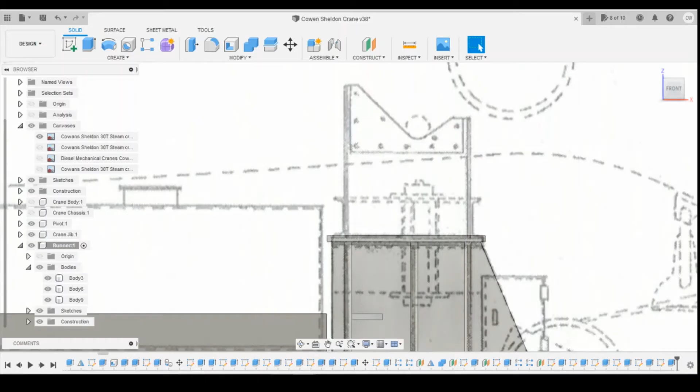So if we go into Fusion, I'm going to turn this canvas off and create an offset plane from the top surface of that cradle, and just come up by 0.2 millimeters. Let's delete all that lot, start again - 0.2 millimeters, okay, and it will be creating a new body here.

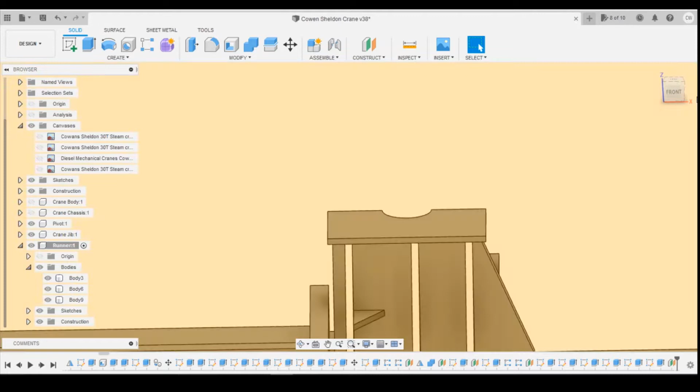So we will have to start to think about labelling these up, I think, in a little bit, because there'll be quite a few of them here.

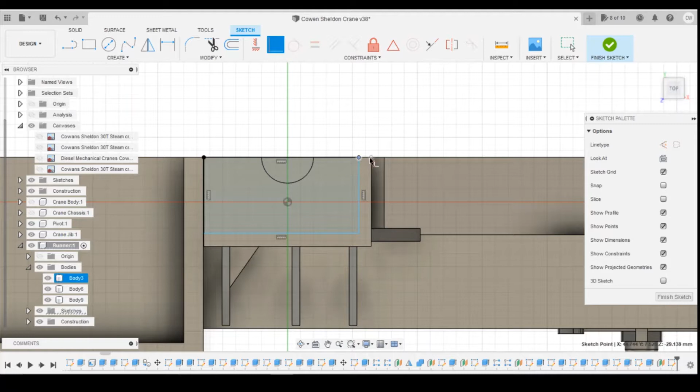So we're going to create a sketch on this top surface, and we're just going to create a rectangle that's the same size as what we've originally got here. So just do a rectangle like that, and then we can coincidence the corners in here like this. Okay, and then we extrude upwards - I'm going to go 0.2 millimeters just to give us that base plate that we've got there.

So the next thing I want to draw are these two upright plates here, which look like they're in the same position as these diagonal plates we drew in the last episode.

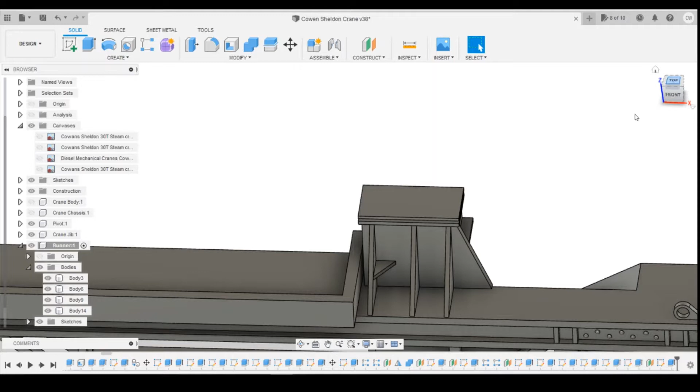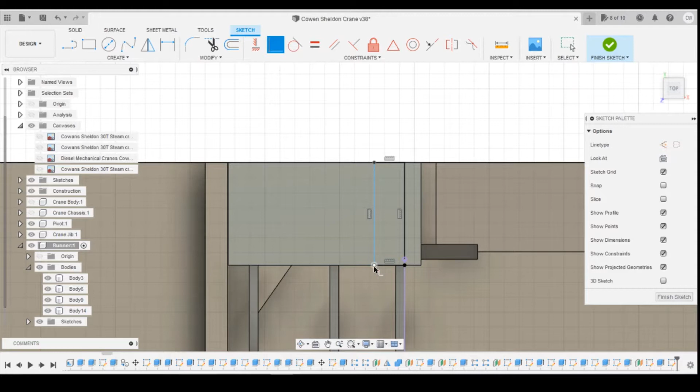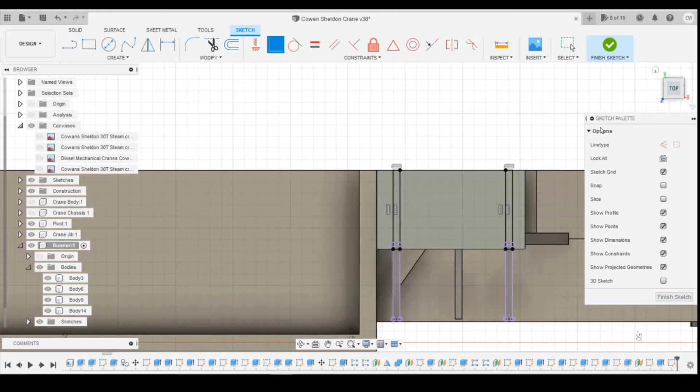So if we rotate to the top, we can draw a sketch on that top surface, and we're going to just do two rectangles for this. I'm not worried about the size at the moment - all I'm going to do is coincidence them in line. Coincidence the corner points here in line with those uprights, and that will snap the dimensions there. And do the same on this side. There you go - so we've now got those two profiles that we can use to extrude upwards.

Let's turn the canvas on, see if we've got those - yes, we have. Okay, so I've started to drag them up both at the same time, but you will notice that one's higher than the other, so we can do that to that point. Select that top profile on this one, and we can drag that the rest of the way. Okay, so we're around 1.4 there. Okay, so we've got those drawn.

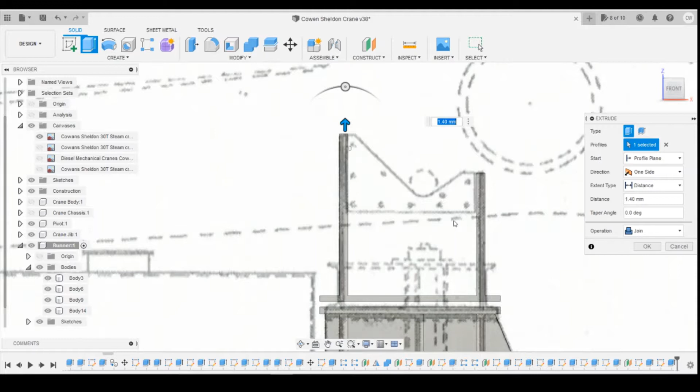The next thing is we're going to want to draw this plate here. If we look at the photo here, this plate looks like it's in line with these plates that we drew down the bottom. So if we come back into Fusion, what we can do is find the construction planes that we had for these, and just flick through these to find a plane that looks like the right one.

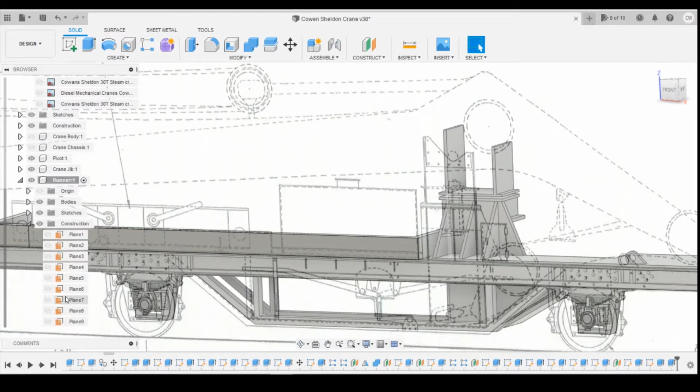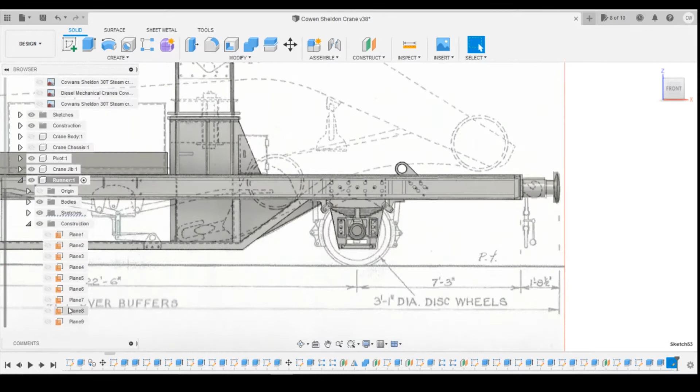Might be that one - let's turn sideways. Yes, so we're now going to turn that back on with a little eye icon so we can see it, and create a sketch on that plane. I'm not sure if that works - I'm going to finish that sketch. Plane 6, let's delete that. Or redefine sketch plane will work, and select plane 6 - we know we've got the right plane there.

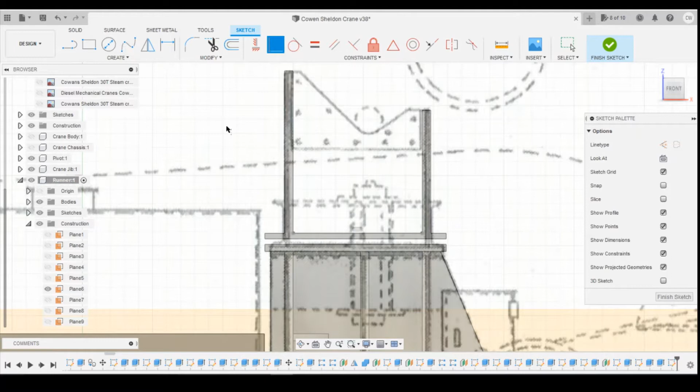Okay, so we just go back into here, edit the sketch here, draw lines here for this one. It's not going to snap into the corners as we want, so just draw a line, coincidence it into the two corner points, like so. And then we'll draw a line coming upwards - again, it's not going to snap to that point, so coincidence like that, and then the same on the other side.

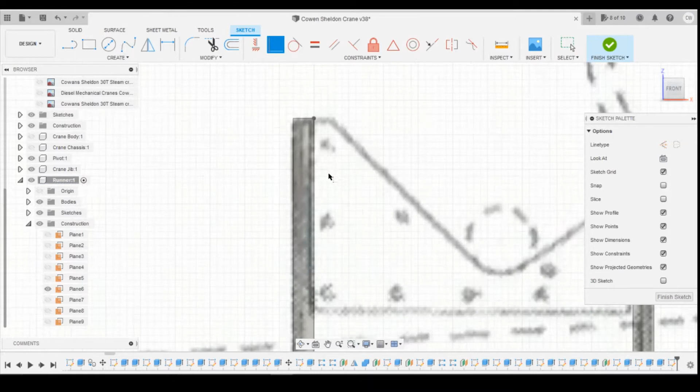So the next thing we're going to draw a freehand on here, so that's going to be a line to there and a line. I'm going to draw a line there, and I'm not worrying about its position because I'm going to fillet that corner out.

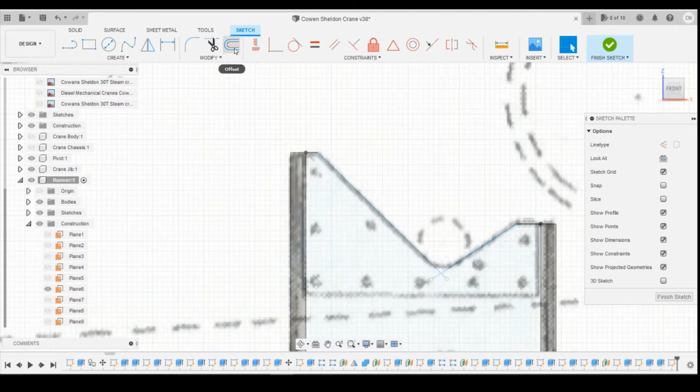Okay, so you see how we cut that in. Next thing we can do is fillet. So what we actually need to do is trim these two corners off so we can get a point, and then we can fillet that point like that. We just play around with that till it looks like it matches the drawing. So yeah, probably about 0.5, 0.55 there.

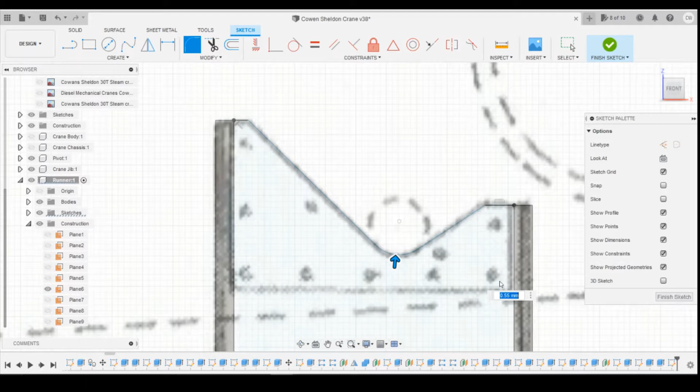And enter. Okay, and then we need to define these so that it's all predefined. Angles in there. Okay, that's all now predefined, and then we can extrude this.

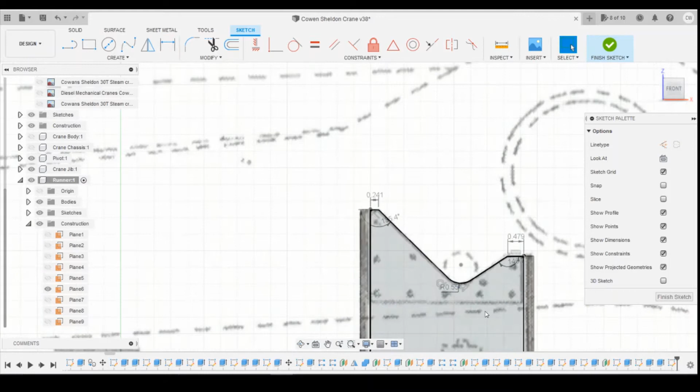If you remember, on the last plane we did a symmetrical extrusion, and I think we did 0.25 in each direction.

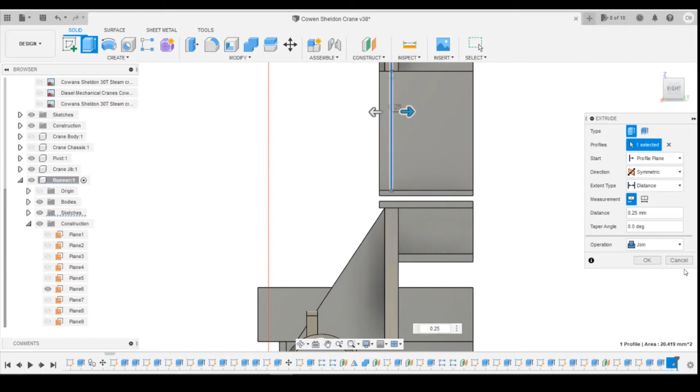We'll click on OK, and then we can check that by just doing inspect and going from there to there. That's not even picking up the right thing. Let's rotate it up slightly. There we go. You can see that is 0.25.

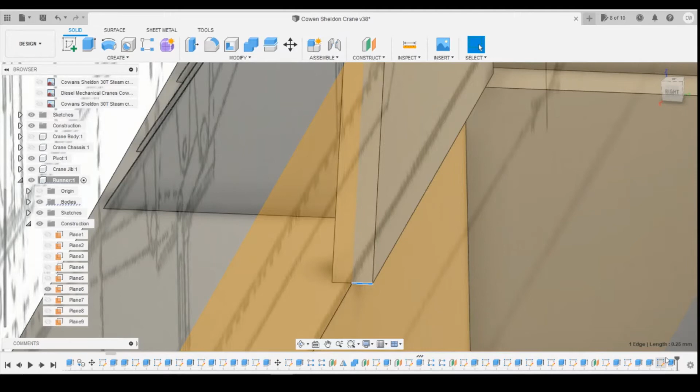Okay, so we've now got in here that profile that we wanted. The only thing that I will notice on that picture is this end is also extruded out further. So if we try and see how much of it actually comes forwards, I think it might just be the plate here and this side of the plate.

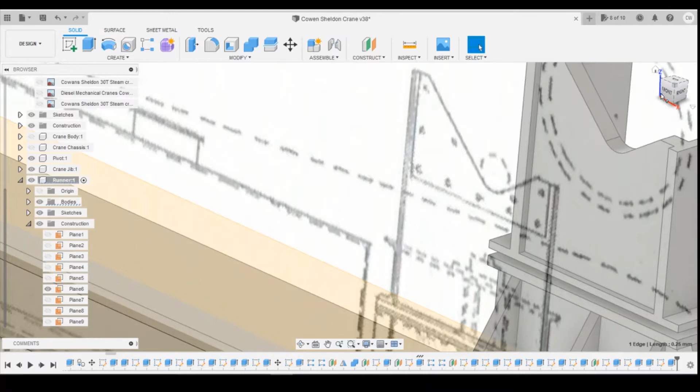Yeah, pretty much. So if we come onto the side profile and draw on that side profile just a simple line coming down here, that turns these into two separate profiles. We can extrude this one.

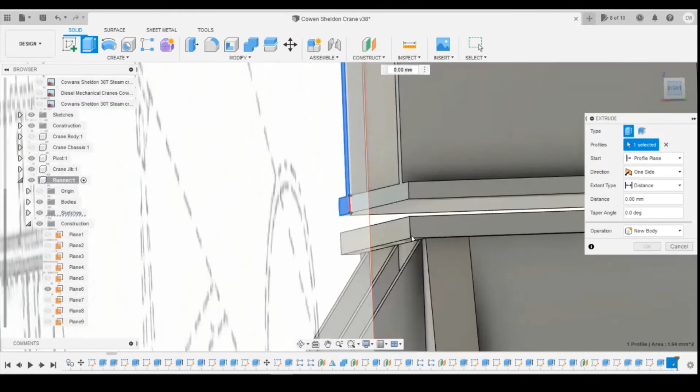Let's have a look on our canvases. It's not on there, unfortunately. So we'll just come at 0.5 millimeter forwards. Make sure it joins. There we go.

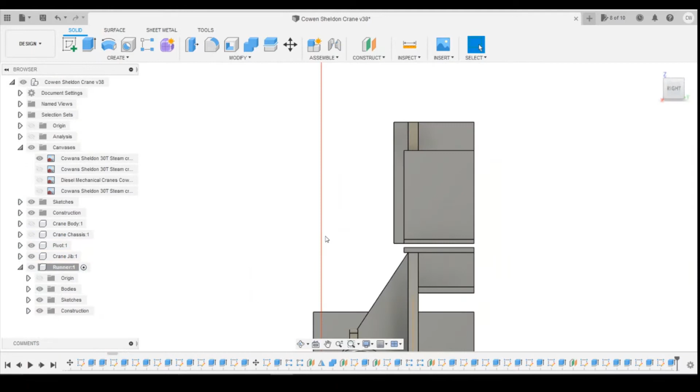Okay, let's have a look on the canvas. Actually, is there a cutout on there? No, it's not. So the profile of the cutout's not on the canvas. And what I mean by that is, if you look here, we've got like a diagonal piece coming down, which is fine. So we'll just freehand that.

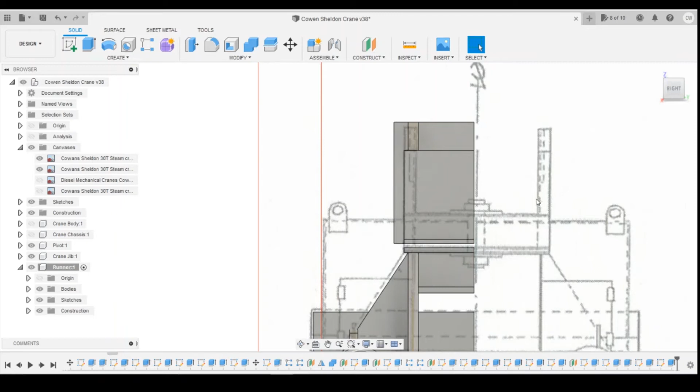So it looks like there's about a foot or so gap between the two bits in the middle here. So if we create a sketch on this side profile, initially we'll draw a line, that's a rectangle, draw a line downwards, and we'll see if we can get it to vertically constrain to that point there. Yep, good.

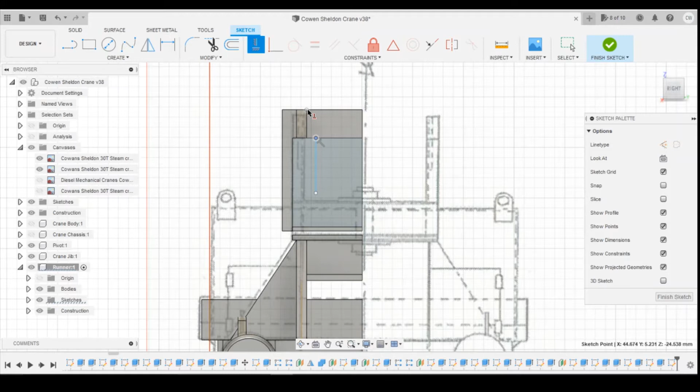Okay, let's have a look at the height. So it's only about 4 or 5 inches maybe.

So if we draw a line, we're going to start on this profile here. Something like that. A millimetre there, so we're going to have that foot gap in the middle there.

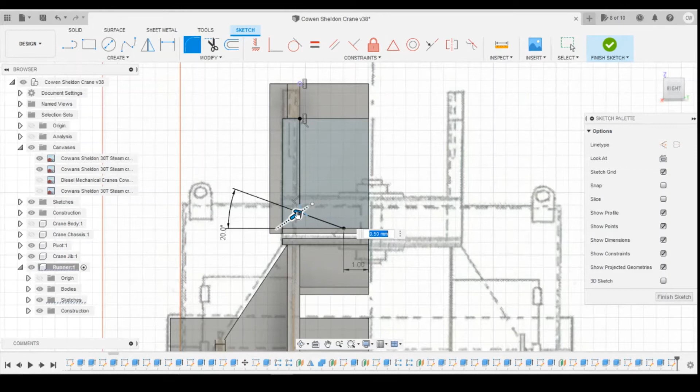Define the angle in here. It's about 20 degrees. Let's have a look. Yeah, and then I'm going to fillet off that corner just to round it out a little bit, like that.

So let's see if we've got any other photos that show it. Yeah, no, I'm reasonably happy with that profile that we've got there.

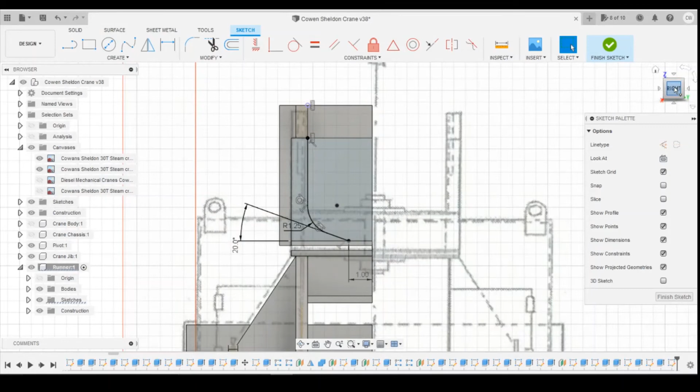In fact, I'm not talking, because there should be another I-beam up here. Let's undo all that. Sketch. Okay, let's turn sideways, see if that I-beam's on this sketch.

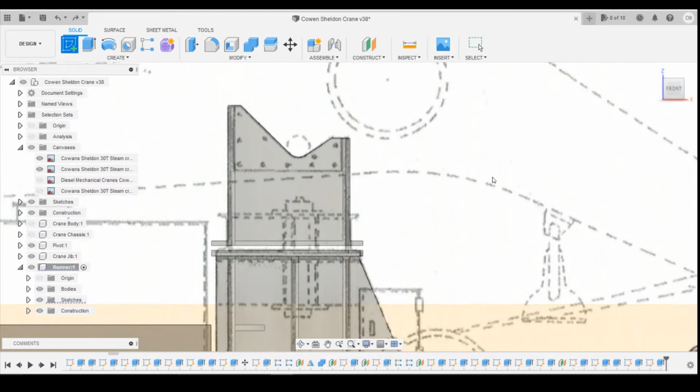Yes, it is. Okay, so if we create a drawing on that plane there, and we'll do a rectangle, I reckon it's going to be about that position. Define that, 0.3mm thick, and height-wise 1mm.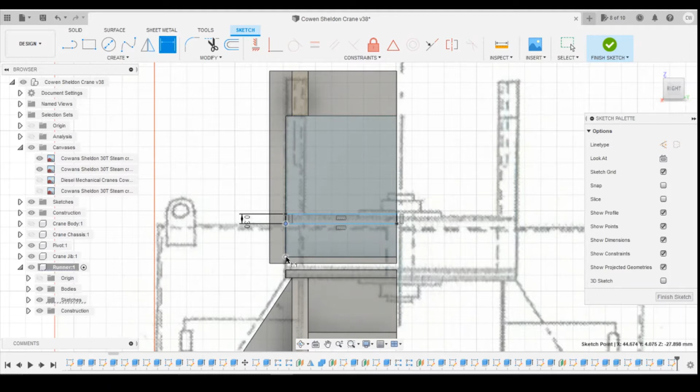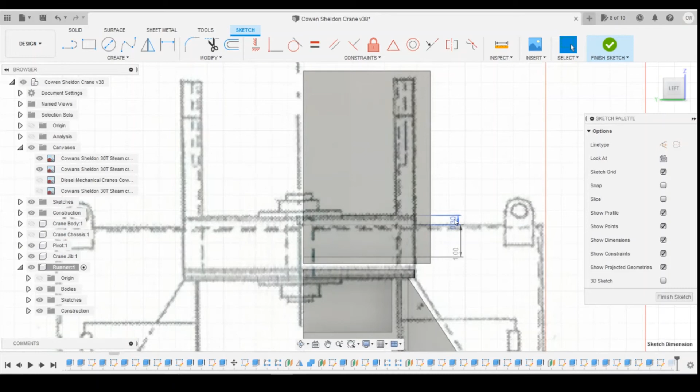We extrude this to the same level as that. Okay, yeah, the height-wise looks okay. I might make that a little bit thinner though. Come into the sketch, edit it. I'm just going to take that down to 0.2mm.

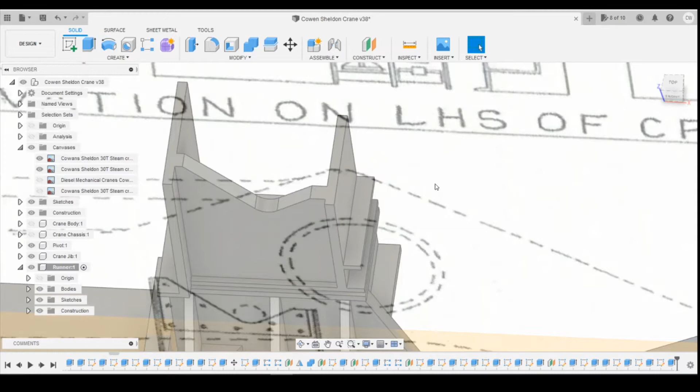It's pretty difficult to see what's going on the inside of this, but we will have a recess in there for our bolt that's going to come through here. So we have to draw the same I-beam on the other side. Let's sketch on the profile there.

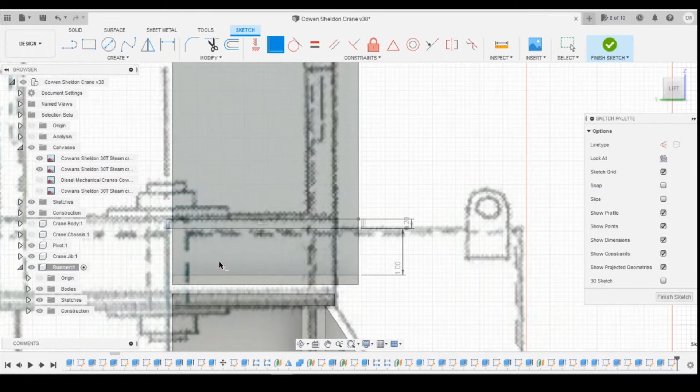Extrude that out to that profile. Okay, now we want to draw that profile in here.

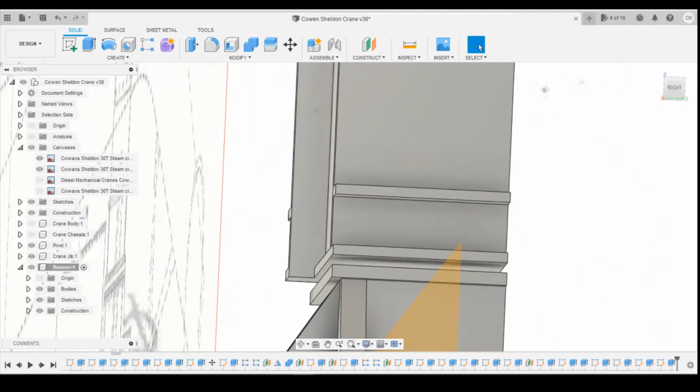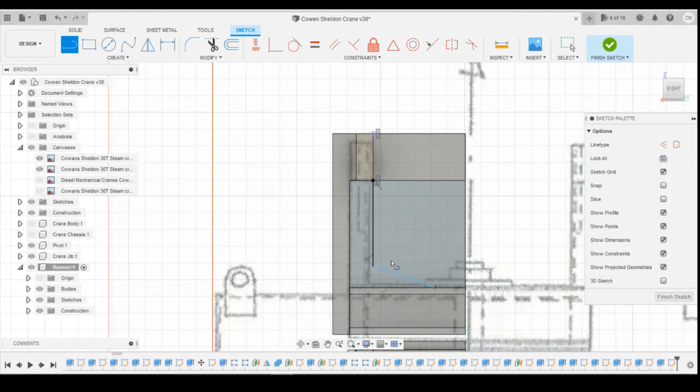So the line coming down, horizontally constrain it to there. And then from here we're going to come at an angle in line like that, and then up. Find that distance there we said was 1mm, and the angle we said we wanted 20 degrees, and then fillet off this corner.

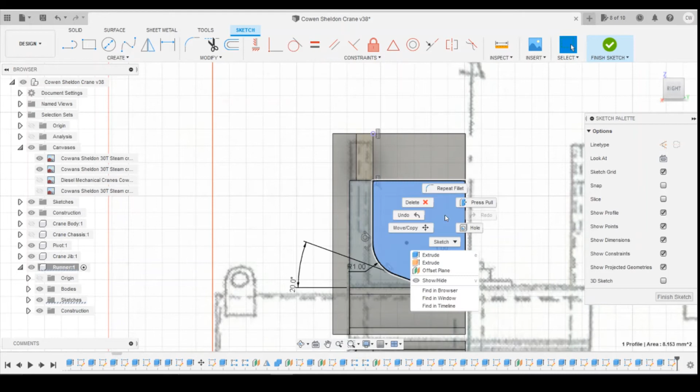So I've done a 1mm fillet there. Okay, now if I extrude this profile in this direction, it'll cut out both sides except for the top half, which isn't a big issue because you can just rotate it around and then extrude upwards to get rid of that.

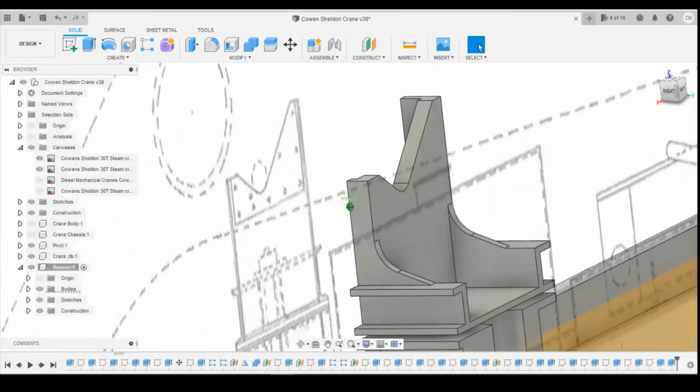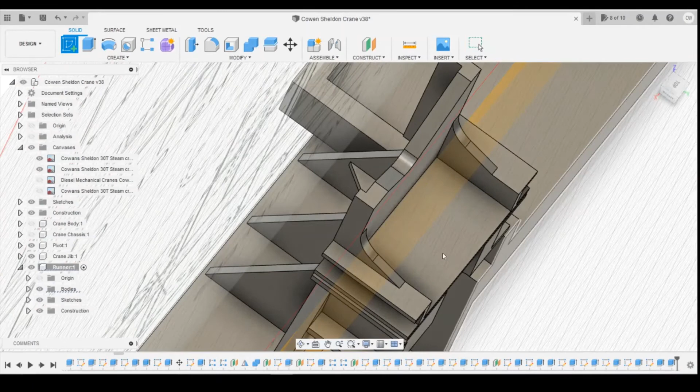Okay, so we've got a profile there. I now need this circle profile cut into that. So if we draw a sketch on that top surface here, and we do the circle, find the midpoint. I think we said 1.6mm on that last one, and then just extrude.

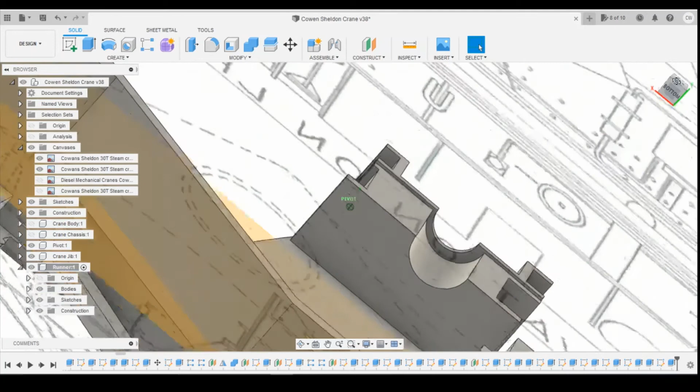Downwards. That's not... okay, let's go a different way about this. Let's get rid of that drawing I've just done there, as it turned upside down. Okay, so I've got rid of that drawing but kept the sketch.

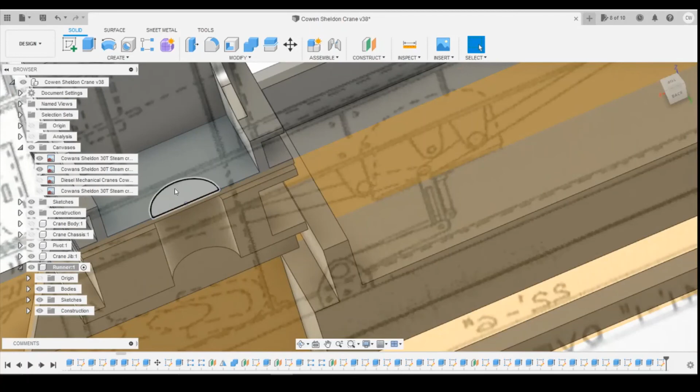I'm going to create - I'm going to go project. I'm going to look for that geometry there, and you can see it projects it onto that top surface, and then I can just extrude that down, cutting all the way through.

Okay, so that's our centre boss. There's plenty of room here where we can get the head of a bolt or something like that to glue in. Okay, and you'd need to put that in before you did obviously putting the jib on the top there.

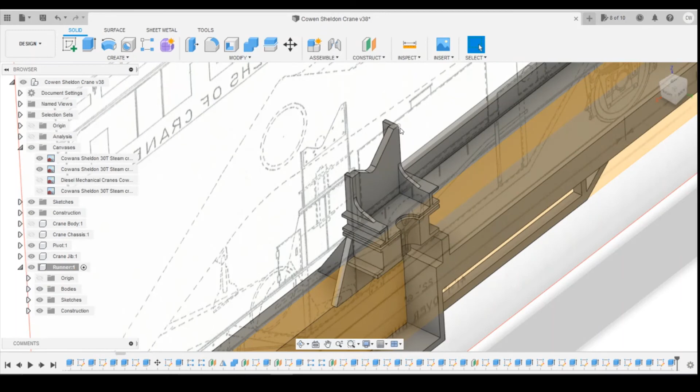Okay, so I think the last thing we really got to draw on is this supporting plate here and the rivets on it. So we come back into Fusion. If you look on the sketch, you can see it's there on the canvas. So if we create a sketch on that plane there, we should just be able to

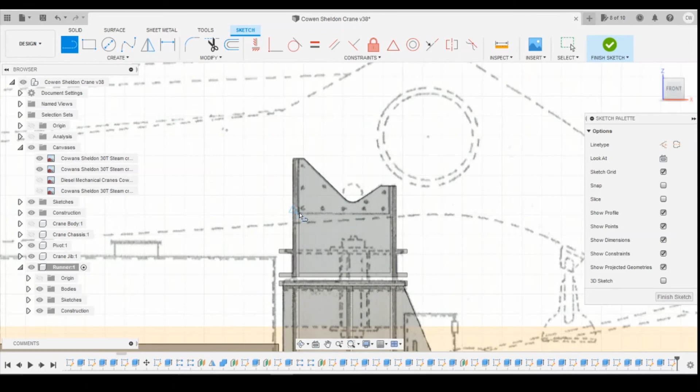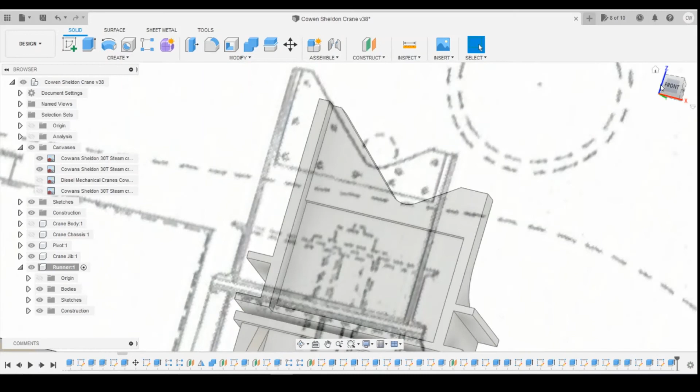Draw a line across and then extrude this forward slightly. Let's go 0.2 millimeters. Give it a bit of a... too much, just joined in here. I thought this was further forwards than that. Let's undo that.

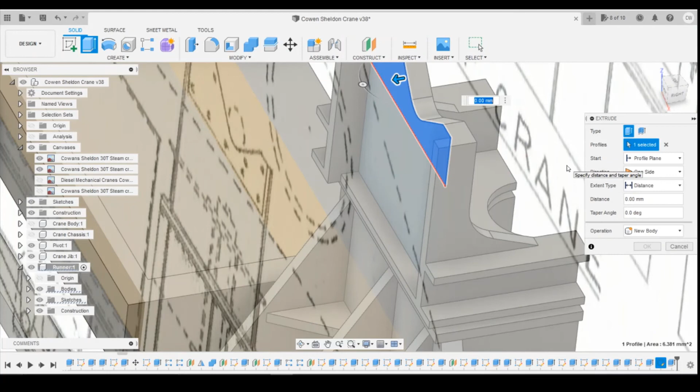Let's bring this forward slightly. And then we'll extrude that 0.2 millimeters so it doesn't snap in. There's a definite recess there.

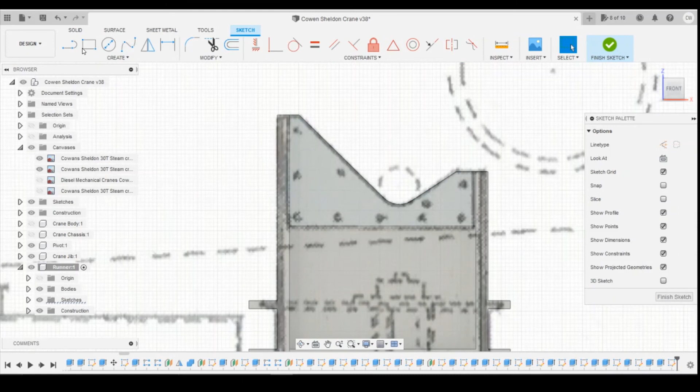Okay, and then we'll just draw the rivets on. So that's probably drawn the wrong thing, wrong profile, so we'll delete that sketch and just draw it again, like that. So we'll start with this bottom corner because that's going to give us the most that we can pattern.

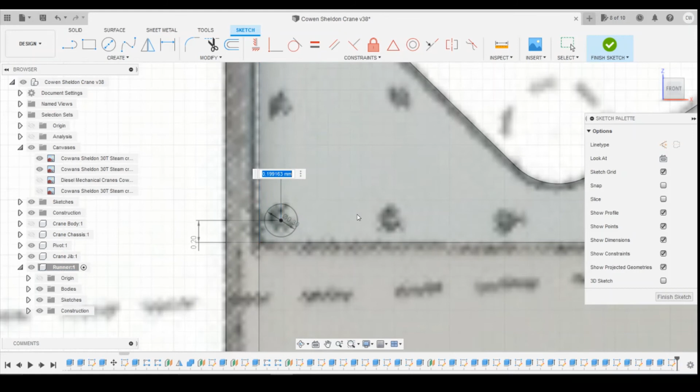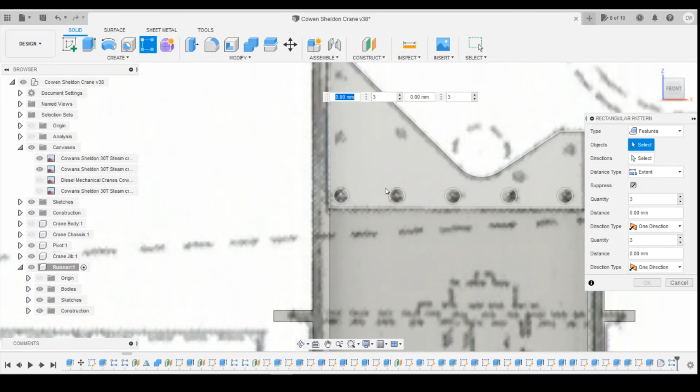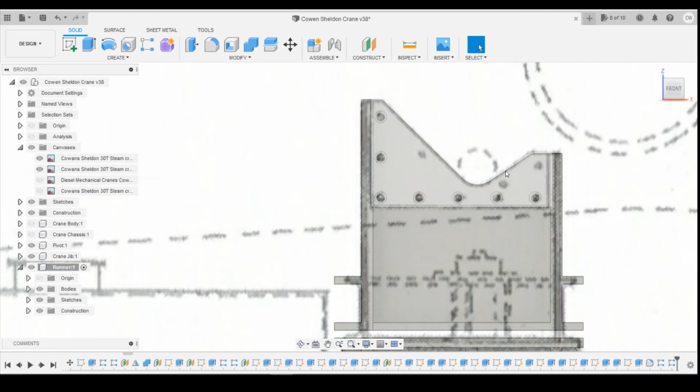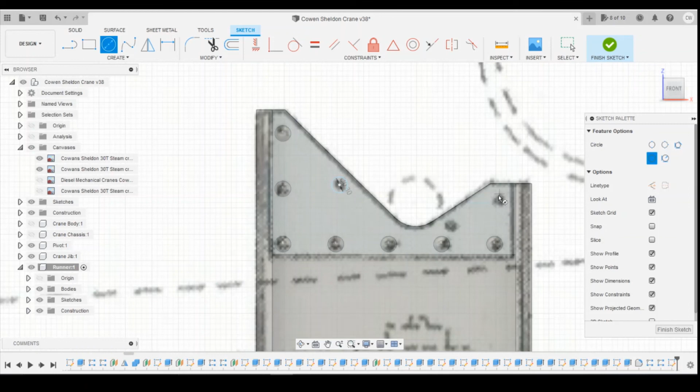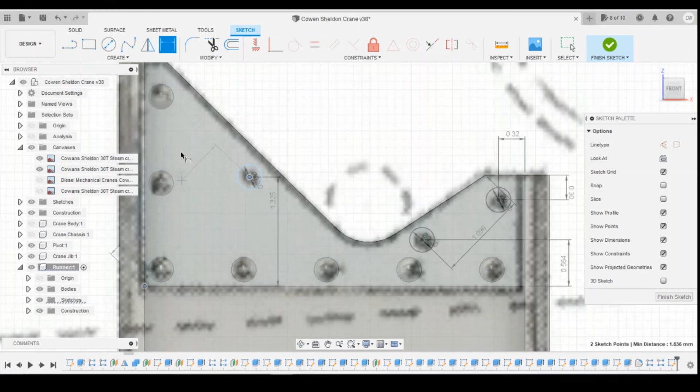So let's just check that pattern matches. Yes, it does look like that. And we can define these - just select these three, extrude and then fillet off the top.

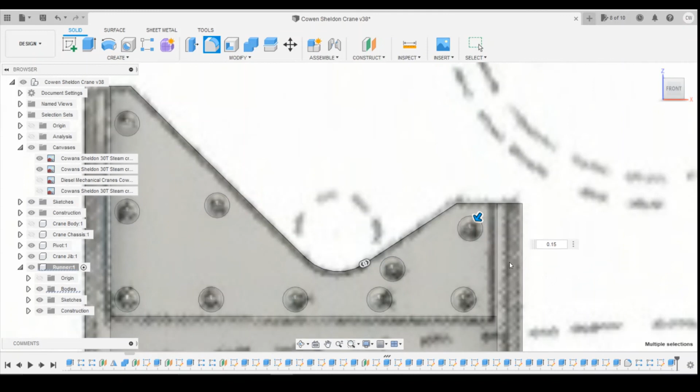Okay, so there's our cradle, both the upper and the lower part drawn. Obviously when we mirror across, that will then complete that whole sketch there.

So I hope you enjoyed watching today's video on how to draw that upper part of the cradle.